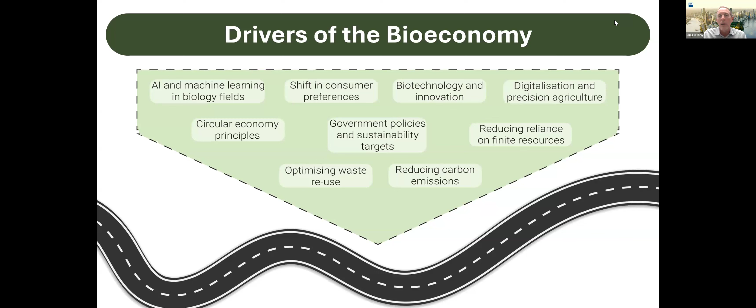Science is only going to continue to progress. Some of the policy targets around the world are going to continue to increase. So we need to think about what Australia will be doing to ensure we stay abreast of this rapid change.

Of course, the benefits of the bioeconomy are profound. We're talking about growing new biomanufacturing sectors, increasing economic growth, increasing economic diversity and complexity. And of course, that builds resilience into an economy. It benefits not just future industries, but existing industries, unlocks sovereign manufacturing, and unlocks waves of new innovation. And of course, environmental benefits and carbon emission reductions and social benefits in a range of areas, including jobs that will be resilient in the future economy.

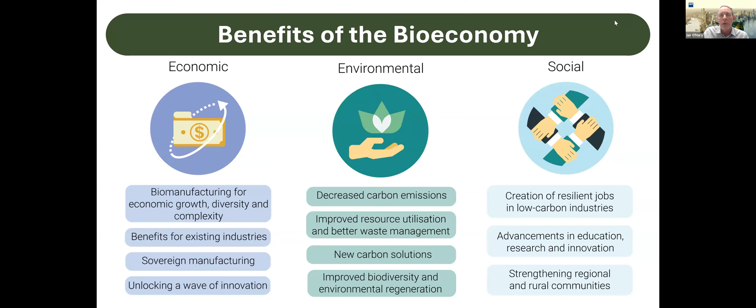And strengthens regional and rural communities. So lots of opportunity globally, lots of opportunity for Australia as well.

So what our report really tried to do was to say, within the context of all of the things bioeconomy could be, what are the things that are really important for Australia? What are those opportunities that Australia can grab onto? We actually came up with 8 priority sectors that we believe bioeconomy already does and will continue to play a big role in and continue to grow.

And the top line are really the ones where already a lot of progress is being made, in the area of industrial biomanufacturing, in looking at how we can value add to primary industries, and there's quite a bit of work going on across a number of sectors to look at how we can better value add to the economy of agriculture.

And of course, today what we're really focused on is the low carbon liquid fuels and sustainable aviation fuels area, and I'll talk a bit more about that just over the next couple of slides.

But in other areas, there's opportunities to produce new food ingredients through things like precision fermentation, renewable gases - a lot of momentum in Australia in this space as well.

In the waste to value space, better utilisation of our waste resources is critically important. But then there's a couple of new and emerging sectors - the opportunity to grow carbon, nature and biodiversity markets over the next few decades. And if we start early, the opportunity for Australia to be a leader in bioeconomy equipment.

Technology and services. Much like in the mining and resources sector, the METS sector is now really a very significant part of the economy. We would hope that one day the METS sector will also be a really important growth opportunity for us as well - taking the jobs and skills beyond straight biomanufacturing and exporting a range of services from this sector as well.

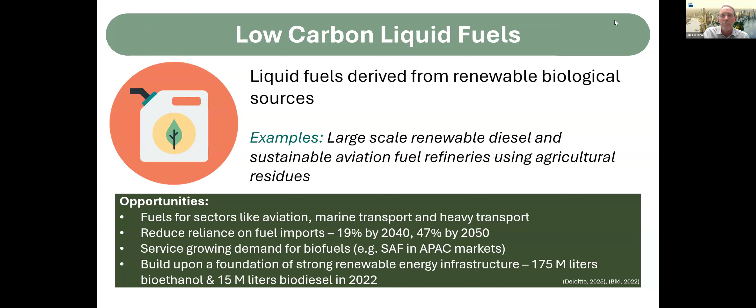So why low carbon fuels and SAF now? As a number of recent reports have shown, imports of total refined fuels in Australia has increased from around 30% of our total fuels to over 80% since 2010. So it's only 15 years - we've gone from being largely self-sufficient in refined fuels to really being quite at risk in terms of our fuel production capacity.

There are few alternate solutions, as we all know, for the hard to decarbonise sectors like aviation. And that will continue to be true well beyond 2050.

The vast increase in fuel imports is having impacts on balance of trade, dramatically impacting on fuel security, and also impacting our economic resilience. We've been fortunate that technology risks around the world are being reduced through that international experience. But we don't want to leave it too long before we also take on some of the economic opportunities by being an early mover in the sustainable aviation fuels area.

And of course, there are clear markets for products in Australia and overseas. The recent Clean Energy Finance Corporation report, the Refined Ambitions report, that I'm sure everybody on this call has read, identified current production infrastructure and announced projects around Australia. And this is a really fabulous map that shows the range of projects across every state in Australia. It shows the national opportunity, the national impact that sustainable aviation fuels and low carbon fuels could have.

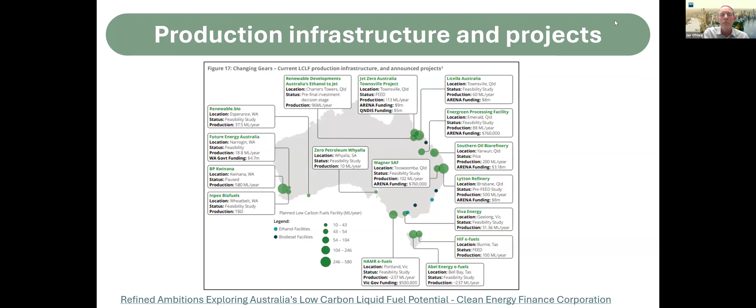So as part of this program, we did look at what were the barriers and challenges, and we identified 4 key barriers: the absence of a cohesive national bioeconomy strategy. And of course, in some of those subsectors like sustainable aviation fuels, there's still work to do in the strategy and policy space as well.

We need to continue to work on feedstock supply chains. We need to address those gaps between early stage development and commercialisation, and we need to address workforce skill shortages.

So I think this is one of my final slides. What we really wanted to highlight were the recommendations. The report's available for you to read, but our recommendations were that Australia really needs to think about how we develop a national strategy in bioeconomy, but also in each of those subsectors, in sustainable fuels, in renewable gases, and other areas. What's that suite of strategy and policy that helps to unlock this opportunity?

We need to continue to cultivate world-class economic and scalable feedstocks. So understanding what we have now, how do we liberate that, but how do we also grow future feedstocks to grow and scale the sector?

How do we build the infrastructure to scale bioeconomy solutions? We work closely with companies like Mercurius Biorefining to demonstrate their technology at scale, and now there are opportunities for Australia to demonstrate other technologies as well.

Thank you. Thanks, Georgie. Thanks, Ian. Next up, we have Samantha Michaux, the team lead of business development for Ineratec. Samantha, are you good to join on? Yes, I'm here. Hi, Hi, Samantha. Good morning. So let me take the presentation. Okay. Can you see my screen? Yes, we can. Okay, perfect.

So thank you very much for inviting me. I'm really happy to be here presenting Ineratech. We are a German company located in the southwest of Germany, founded in 2016, so almost 10 years. Next year we are celebrating our 10th anniversary, growing very rapidly, almost reaching now 150 full-time equivalent, and we keep on growing.

So we are the e-fuel company from Germany. I'm going to present who we are and also our strategy towards the market ramp up of e-SAF, so e-fuel, e-SAF, synthetic kerosene.

So what we do basically is we take green hydrogen combined with carbon dioxide, and we turn it into high value waxes and synthetic crude oil, which following an upgrading step are turned to e-SAF, but also to other synthetic fuels. I'm going to tell a little bit more about that.

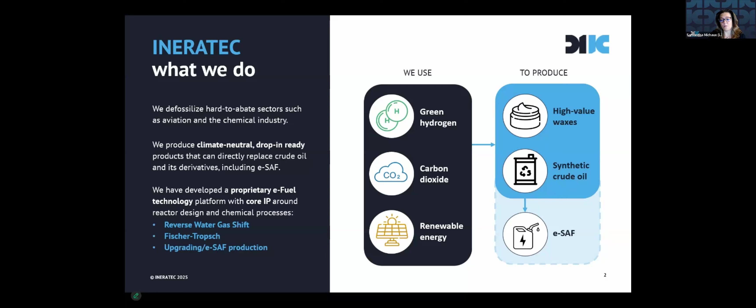We are a technology provider, mainly focusing on the synthesis of the chemical process, having our proprietary technology, which are a reverse water gas shift reactor and a Fischer-Tropsch module, and shortly we have also developed a module for the upgrading to e-SAF and e-diesel. So we are mainly focusing on the synthesis and the upgrading and the distribution of the fuel, mainly active in the downstream value chain.

We work with partners who sell or deliver us the green hydrogen and the CO2. The CO2, technically, we can take any source of - CO2 is CO2. So it can come from industrial processes or biogenic point sources, or of course direct air capture. However, the price for CO2 from direct air capture is still very high, so it's not the favored feedstock for us at the moment.

So we turn the hydrogen and the CO2 first into syngas using our reverse water gas shift reactor, which is then turned through a second step, a Fischer-Tropsch reactor, also a proprietary technology, into a crude and waxes, which are basically byproducts.

The waxes can either be used as a byproduct to be turned into cosmetics or other chemicals, sold directly to those industries which turn them into final products. Even in the food industry, we have discovered applications for our waxes. We have, for example, a customer using our waxes to produce vegan butter - turning the synthetic wax into fatty acids, which, believe me, tastes like real butter. Because I'm not a vegan person, I had my concerns, but really it tastes the same and it's really good.

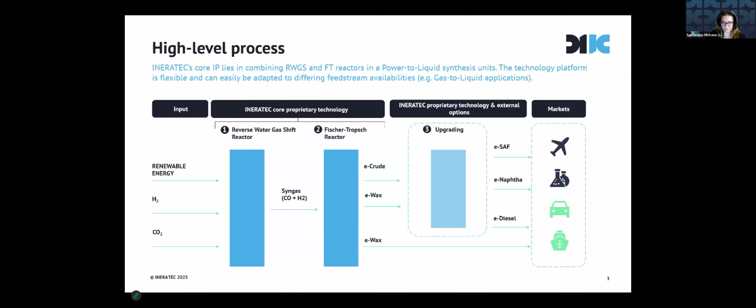So what is so special with our technology? I mean, Fischer-Tropsch reverse water gas shift is nothing new, it exists for more than 100 years now. But we have designed a completely new reactor, which allows us to make them more compact.

So 80 times more compact, twice more efficient, with a high conversion and enhanced heat recuperation. But particularly, our synthesis reactors, included in our synthesis modules, are load flexible, which is very practical when you work with renewable power. So even with a fluctuating renewable energy supply, we can keep the plants operating at a minimal load, which allows us to keep production running.

It's also an advantage regarding maintenance, because by being modular, our reactors can be switched off. So some reactor groups can be shut down to be maintained, while others are kept operating. This way you can keep your production running at a minimal load, but still running.

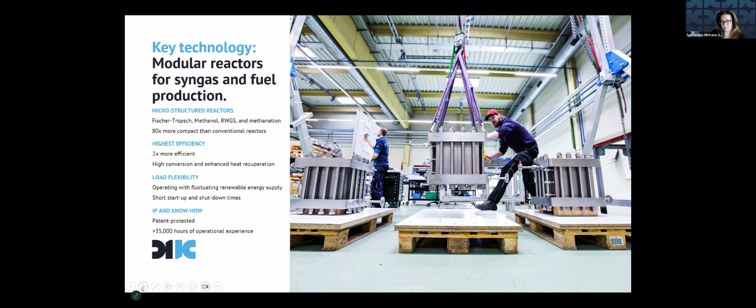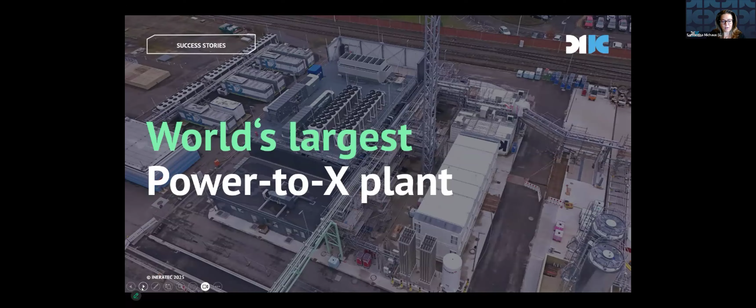So we have achieved our biggest milestone now. We have built our own e-fuel plant in Frankfurt that started production in May this year. I think the best is to let you discover our plant. Here's a nice picture which shows the modular approach of our plant.

You have a big module and two small modules, as you can see on the right side. This allows us easy scaling up of the plant, because the availability of green feedstock is today still limited. So our advantage is that we can start small, and as soon as we have more feedstock available, we just add additional modules.

Following a numbering-up approach. Here in Frankfurt, for example, we have a big module on the left side, a 5 megawatt electrolysis capacity module, plus two 1 megawatt modules, totaling a 7 megawatt plant. With a 7 megawatt plant, you can produce up to 2,500 tons of e-fuels yearly.

So what we did here was exactly the situation: we had limited available CO2, biogenic CO2 coming from biogas directly on site, and green hydrogen from chlor-alkali production, and the volume of feedstock was limited.

That's why originally we had been developing a concept of 10 megawatts, and we had to downscale because the availability of feedstock was limited. This is an advantage today because it means you can easily scale up your plant as soon as feedstock becomes available. By having a standard design of our modules, we just add additional modules, following the Lego principle, to scale up the plants.

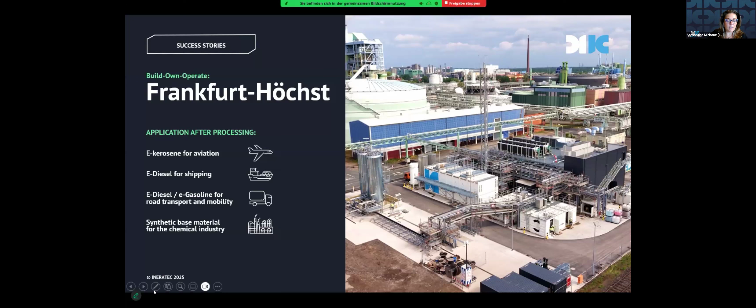In Frankfurt, we are producing e-kerosene, e-diesel, e-naphtha, but also waxes. Let me share this video with you. Then you can discover the start of production of the plant with the first drop of e-fuels, which was delivered two months ago.

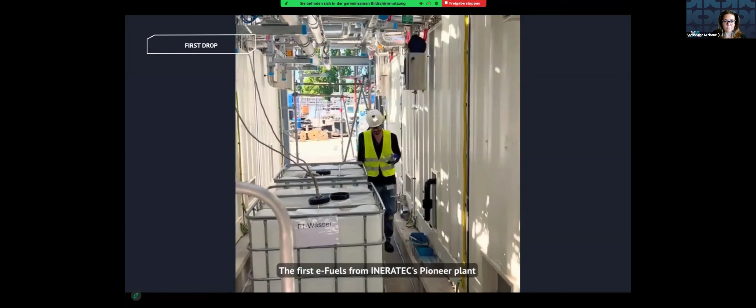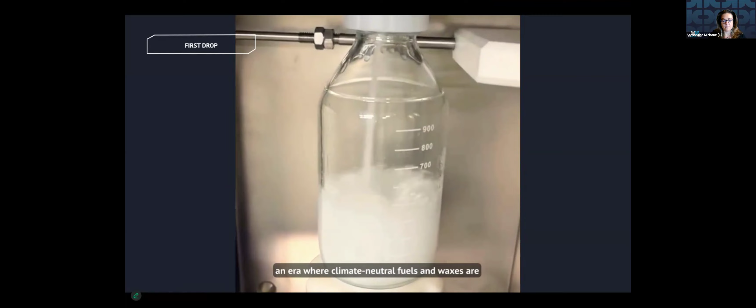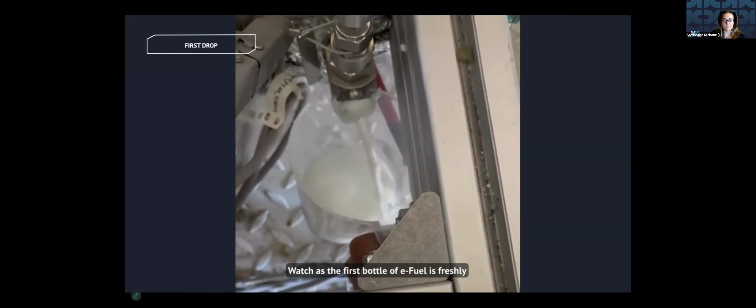The first e-fuels from INERATEC's Pioneer plant are here. Our Pioneer plant in Frankfurt has started operation, and with that, the very first drops of e-fuels and e-wax are flowing. What begins with a single drop marks the start of the next era, an era where climate-neutral fuels and waxes are no longer a vision but reality. After startup, the commissioning lead hands over the symbolic first drop to the site manager, who will lead operation from now on. These first e-fuels and e-waxes will be stored in our on-site tanks, getting ready for first delivery. Watch as the first bottle of e-fuel is freshly tapped at the plant, a meaningful symbol for what's to come.

So how does our scale-up strategy look like? Of course, Frankfurt with a production capacity of 2,500 tons is a lot, but at the same time it's nothing considering the global demand. So this was our first-of-a-kind plant, a break-even plant. Now we are planning the next commercial plants, primarily in Europe, targeting a capacity of around 25 megawatts of electrolysis capacity, about 8 to 10,000 tons of e-fuels yearly.

But we are also already working on the commercial rollout with the design of bigger plants, targeting a capacity of 30 up to 40,000 tons yearly. This is the equivalent of 100 megawatts of electrolysis capacity.

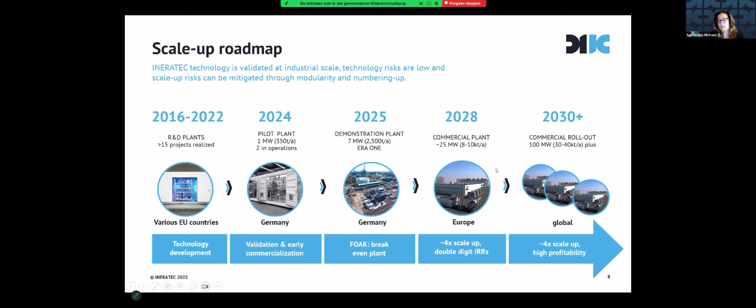So, this is Era 1, the first e-fuel plant in operation currently in Europe.

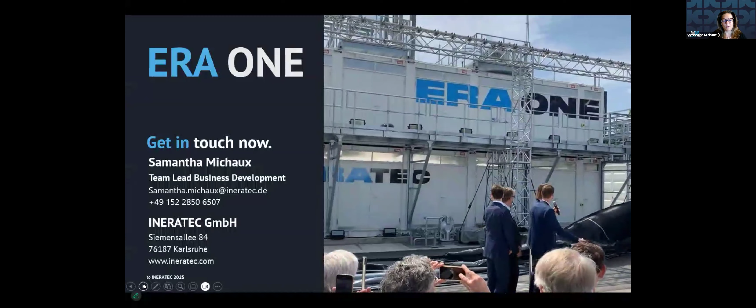Oh, that's all. Thanks, Samantha.

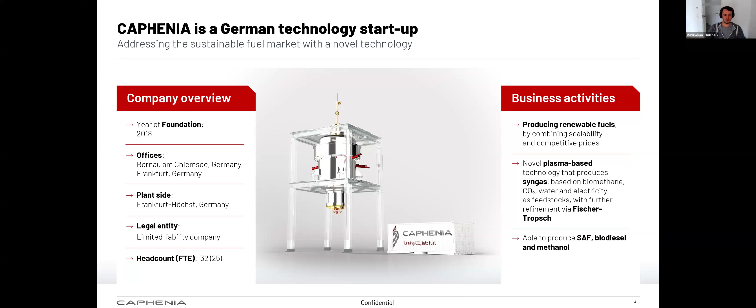Our technology itself is actually pretty basic. We only need 4 feedstocks. First is renewable electricity, then we have CO2 and methane, both of which we can get from biogas. The last ingredient is water. With those 4 ingredients, we are capable of producing syngas.

Our reactor is only producing syngas, and that syngas will then be used in a later process via the Fischer-Tropsch synthesis, through which we can produce SAF, diesel, naphtha. We also have the option of a methanol process, methanol technology, but we are not focusing on that. It's also a possible way to use syngas.

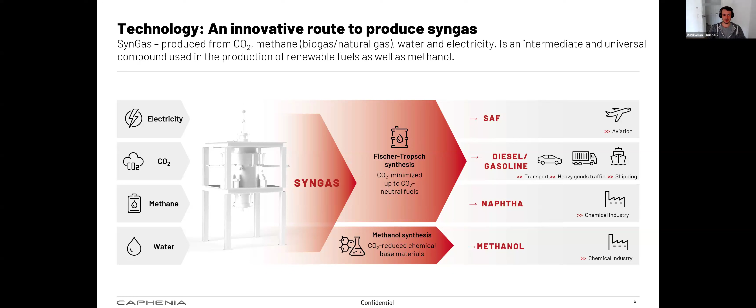Here you can see our reactor and the chemical processes inside. Technically, each of these 3 processes is nothing new; they are well established and well known for years, if not decades. The speciality about our reactor is that we are the first of its kind to develop a reactor which has all 3 processes combined in one, which we use to produce our syngas.

Our reactor is also pretty modern in construction. You can see on the left side our PBR reactor, the Plasma-Boudouard reactor. All ingredients going into the reactor will come out at the end - we have 100% selectivity in our process. Compared to regular PTL processes currently established, which always have some kind of waste products like oxygen or water, that is the advantage of our reactor: we use 100% of everything that's coming in.

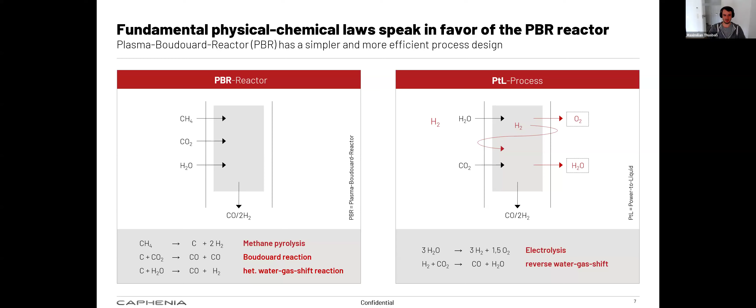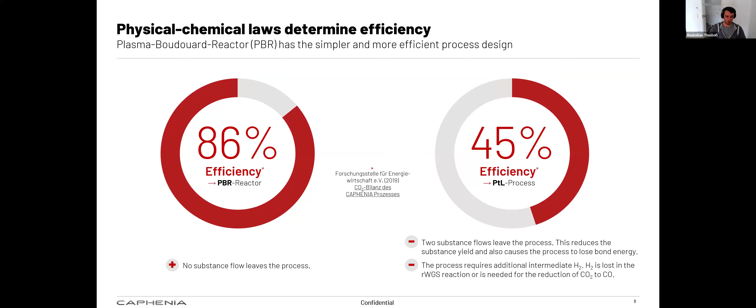With that said, we also have a power efficiency of 86%, compared to 45% efficiency in regular PTL processes, from what we have seen so far in our research. How do we achieve this 86% efficiency? In our reactor, the plasma zone is at the top, and the heat produced there will then be reused in each of these processes. That's the advantage of combining all 3 processes - we can use the heat produced once.

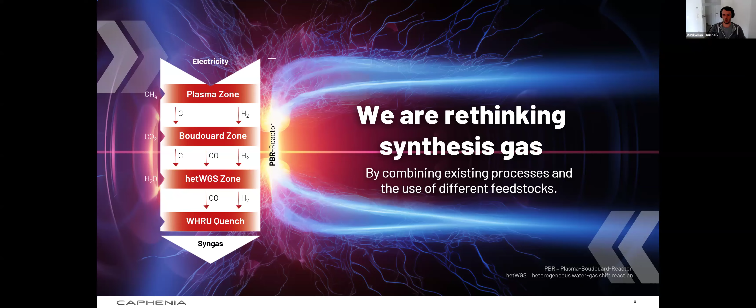With that said, we have a bit of a competitive advantage. Our SAF production has a CO2 reduction of 92%, higher than any other fuel route we have found so far. As mentioned, the 100% selectivity means we have no material loss and less energy loss thanks to our modern design. With the 86% efficiency, another advantage is our very high feedstock availability - technically we only need electricity, biogas, and water. Depending on the scale, we have to add a bit of CO2, but that's depending.

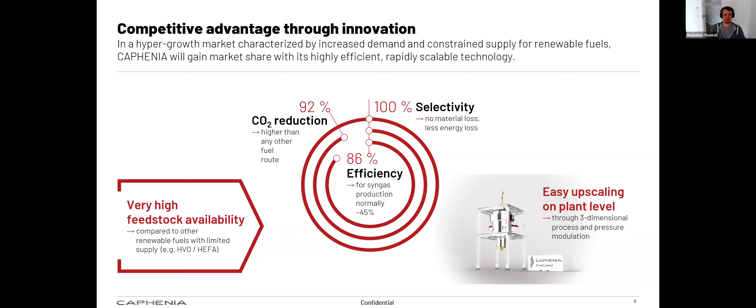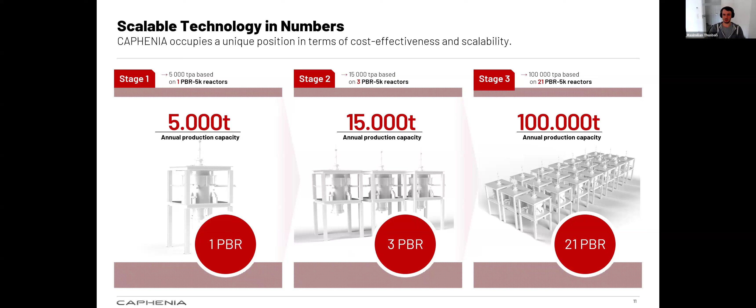After that, you're free to also add another reactors. You can scale it up to 100,000 tons, which is very energy efficient. And the second option is we are capable to scale in size.

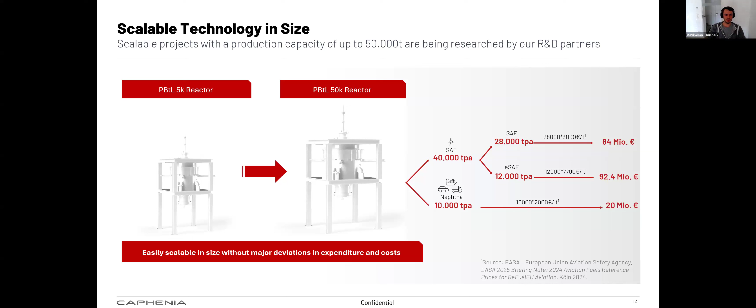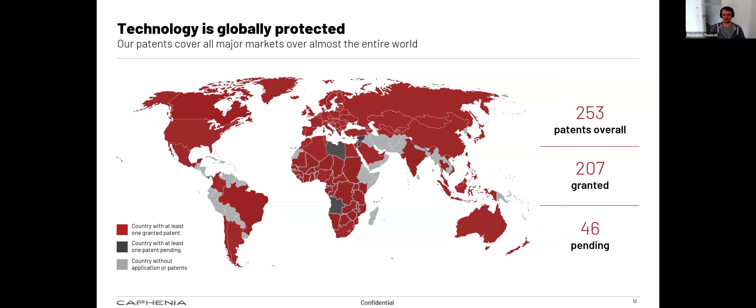Then looking at our partners, we have partners for the project implementation and development, and also for research and development, which are mostly universities and research institutions, but also some engineering companies who are in the development industry.

On the left side, most noteworthy are Lugresta. Lugresta is currently building one of the biggest biogas plants in China with a 16 megawatt biogas plant.

They are our partners for everything related to the biogas purchases and the build up of a biogas plant, because our reactor is capable of using gas from the grid system and also from biogas plants. We can use the grid system, which is usually filled only with fossil gas, but once in Germany, we have the option to make balance sheet purchasing, meaning that we can buy biogas in the north of Germany, but still use the fossil fuels from the south.

But as you probably know, SAF needs to be renewable and sustainable. Therefore, we have to use biogas.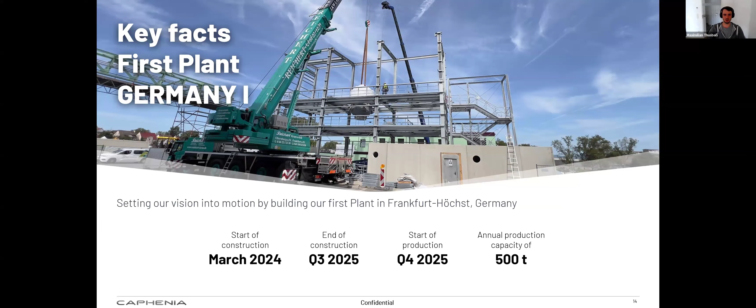Once that is done, we have already started a couple other projects. We have a lot of interests in other locations. Once that is completely done, we will go into commercial production, which we are currently on the best way to do. Here on the right side, you can also see in Frankfurt how our reactor looks today.

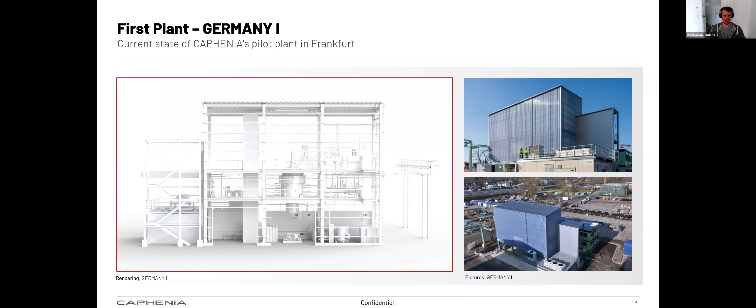Sadly, you can't see the inside, but we have a 3D rendering model from the inside, so you have an idea of how it will look like.

Then, talking about our project in Australia, we called it OZSAF. We want to bring a PBR reactor to Australia. We have been in contact with a lot of organizations already, including Bioenergy Australia, Qantas, but also Austrade, which are currently our contacts for consulting and networking.

Our next step is to conduct a feasibility study to determine the best locations. You can see here 6 spots which we are currently looking at, but they will be much more by the end of the year. We are planning to start the feasibility study in early 2026.

Till then, we are trying to build awareness and to expand our network. We are currently in the process of securing funds and investment. We are in contact with a couple investment firms already.

And as I said before, we also have the option of building a biogas plant. According to our contacts in Australia so far, the ambitions to build up the biogas industry in Australia are very high currently, and that provides a perfect opportunity for us to look at the feedstock routes.

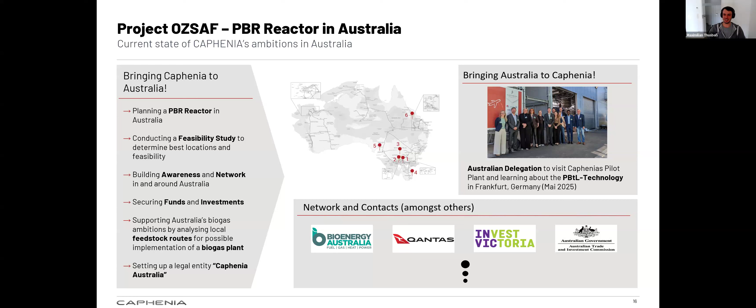And that being said, that's already the end. If you have any more questions, please don't hesitate to contact me, or you can go to our website. If you want to know a bit more about the details, we have a white paper there which you can download. You will learn a bit more about the technology and also the history of our company.

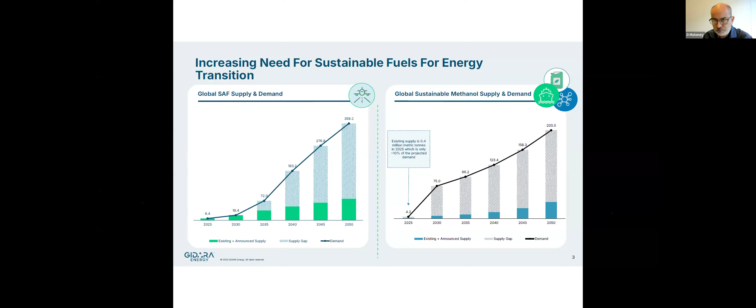What we do is we own the only commercially scale proven technology to gasify waste. Gasification, like the previous speakers have mentioned, has been around for a long time - over 100 years - but being primarily applied to coal. So there's a lot of knowledge from that industry. However, what we do is we gasify waste.

And this can be all sorts of waste. We can take forestry and agricultural waste - from forestry this would be sawdust, trimmings, bark; agricultural waste, things like corn stovers, rice husks, etc. We try to avoid using agricultural products that would go into the food chain - we don't think that's particularly sustainable. So what we'll look at is the waste rather than virgin wood or virgin agricultural products.

We can also work with municipal solid waste. Now, around the world, there's a huge issue with landfills and incineration. You see increasingly landfills being banned, and incineration also causes environmental issues. So increasingly we're recycling waste. Typically waste management companies will extract the valuables like metals from the waste, they'll divert the organics into a biodigestion route, and they may take out glass, etc. What you're left with is really a mix of textiles, plastics, paper, foils, etc.

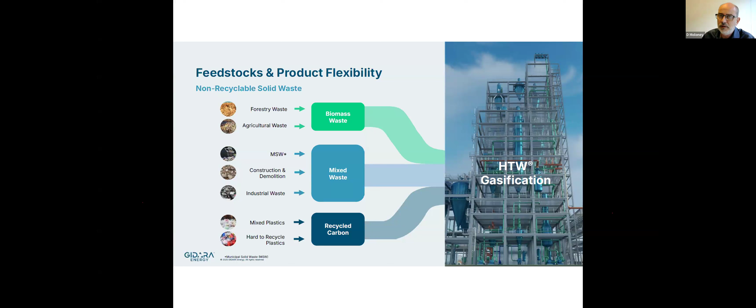Like the previous speakers discussed, once you have syngas, you have a building block for many sorts of sustainable fuels, whether that's methanol or through the Fischer-Tropsch process. Ian mentioned renewable natural gas, so methanation - all these end products face increasing demand from regulations and are increasingly economic to produce, and that's key. A lot of these technologies have been around for a long time. What we're seeing now is it's becoming economic to apply them to create fuels.

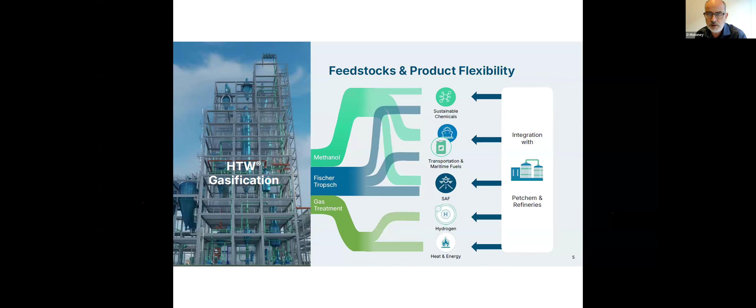The advantage of our technology is it's proven. This technology actually started operation in the 1980s and 1990s in Germany, sponsored by the German government, resulting in commercial scale plants, typically 500 tons a day in a single gasifier, creating methanol. There were plants built creating syngas for power, and plants built for biomass to ammonia - so a wide variety of applications.

When you're gasifying or treating waste feedstocks, one of the challenges is the waste itself is made of many things, so there are impurities in the feedstock. One of the keys to get a stable, usable syngas molecule for fuels and chemicals is converting those impurities, and that's where you need an oxygen-blown gasifier. There are a lot of gasification technologies out there, but really to get a fuel-grade syngas molecule, you need oxygen blown, and our system is oxygen blown.

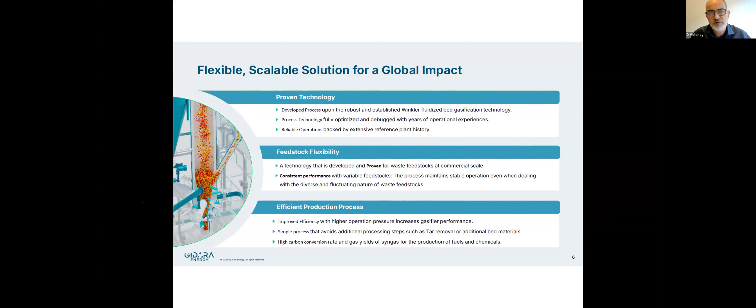The other thing is these facilities need to be built at scale. Our entry point is 500 tons a day. We also have a 1,000 ton a day input unit, and like the previous speakers, we'd build multiple trains as required. But to get economies of scale, the gasification system needs to be pressurized, and our system is pressurized to 15 bar or more.

What that does is ensure you're creating enough syngas to build a complete facility that is economically viable. This is what a facility would typically look like, and you'll hear shortly a great example in Australia. Typically the non-recyclable waste - and this is waste that is not recycled at the moment, which can be biomass, agricultural waste, or municipal waste - gets sorted in existing waste management facilities, shredded, and pelletized. The pellets are quite small, about 20 millimeters or 2 centimeters long, about half a centimeter wide, which makes it easier to transport and store the waste material. It also homogenizes the waste, so you get a more predictable syngas out.

As I said, we gasify it. The syngas treatment then is typical syngas treatment, so from the fossil fuel industry there are a lot of established technologies on how you clean up the syngas. Once you have clean syngas, you can go to methanol, again by established fossil fuel processes, or as previous speakers mentioned, through Fischer-Tropsch to hydroprocessing to SAF. There are emerging methanol to SAF technologies.

A number of technology providers, some of the big name technology houses, are working on that technology, and it will probably start coming online in the next couple of years. So that gives you optionality. With a methanol route, you can sell to methanol-to-chemical producers, road fuel off-takers, or shippers, but you could also potentially expand later into jet fuel. And increasingly what we see is green hydrogen.

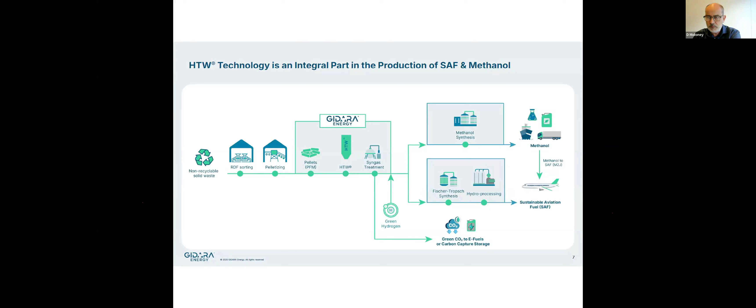So I think the opportunity for Australia is immense. It's taking a lot of proven technologies. The key here is integration of those technologies. Most of these technologies are high technology readiness levels, talking 7, 8, 9. The key is integrating them and making sure they all work together. And that's where we work with a lot of our partners. We provide licensed technology, so we license this technology out to developers, to investors.

I would also note that we're part of ARA Partners, which is US private equity solely dedicated to decarbonization. They own about 30 companies of all sorts of technologies and platforms. But the key is they're all scalable, they're all repeatable, and they're portable, similar to previous speakers. So I appreciate your time today. I think the Australian market has enormous potential, and I look forward to hopefully connecting with you after this meeting.

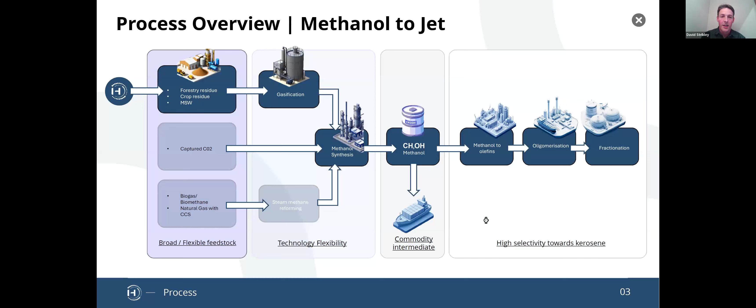This is probably the main slide I'll touch on here. By no means is this a comprehensive checklist. I've only thrown up a couple of examples of methanol SAF production pathways, and I have excluded the waste oils pathway here.

Stepping through the benefits we believe, particularly for Australia, looking at methanol to jet is the feedstock flexibility. We can use all sorts of different feedstock, from CO2 to get syngas and go through to methanol. We may choose to do that where we have a CO2 source and good renewable power. We can use waste feedstock in major cities, and biomass where we're in regional areas. That gives us the ability to then scale our methanol to jet process.

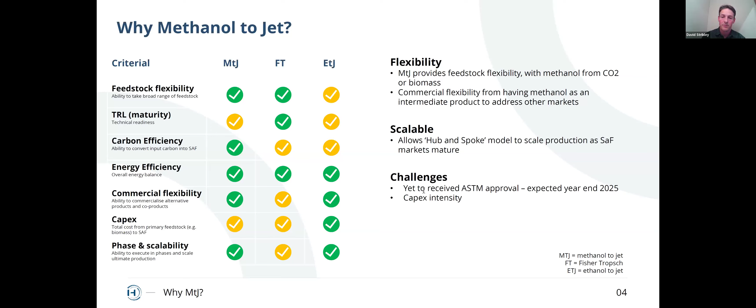And as I said on the last page, we do feel it was shown that it offers a scalable and very future-focused pathway for SAF where we do see costs coming down.

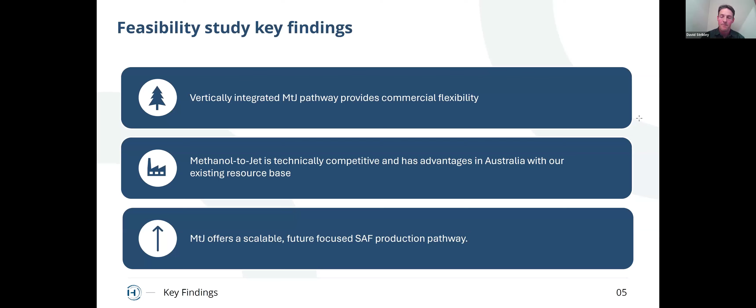So that was very brief given the time, but thank you, and I really enjoyed the discussion today, Georgie. Really good panel, so thank you.